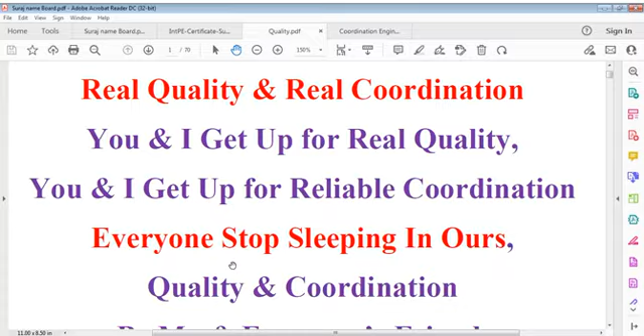And this is my official identification: I'm a fellow of engineers, a chartered engineer, an international professional engineer, and an arbitration engineer as well. This is my certification of international professional engineer, and this arbitration engineer. I'm on the roll of arbitration engineers and on the panel of the Institution of Engineers. Here is the chartered engineer certificate, civil engineering division, because I am a fellow, and this is the file related to quality and coordination. I am closing the chartered engineer certificate and the arbitration engineer file for the time being, because they're not required now. I'll put some of the files in between just to let you know who's talking to you. And now back to you.

I'm on the quality file, and the quality file talks seriously about quality. Quality is a very important part for me as a professional, as well as for everybody who is a professional or a product user who pays money to buy a product. And the coordination file asks everybody what is the meaning of coordination and what's the meaning of quality.

Quality is something that is mandatory, even though there may not be rules, but if you pay to buy something, everybody expects to get a quality product. Whatever is indicated on the product, whatever is claimed about the product, or whatever specification the product should have, the product must have that, or else we can say we are being cheated.

We all buy products, it's life. We buy products which are to be used only for a couple of months, some are used for a couple of years, and some are used for whole life. And it's not an independent product as well, or it's not that only an individual uses it, the public uses it. You have products like national infrastructure or state infrastructures.

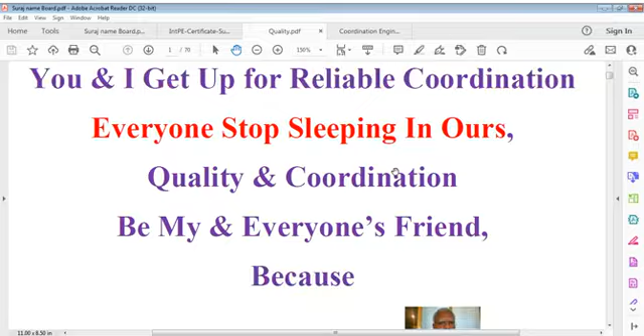I should think of quality, and if I don't think of quality, then there is no meaning of my becoming an engineer or my becoming a contractor or my becoming a consultant or whatever I have. That competency, that consistency has got no meaning if I can't think of quality, if I can't deliver quality. This means I'm not qualified, in fact, for that. It's not simply qualification here, that's academics, that's qualification of competency, qualification of caliber. That I can't do quality work, I can't coordinate.

And that's what I say, that there are, say, two domains, which we may call domains, we may not call domains, and that's real quality and real coordination. When I talk of real, this means this should be practical. It's not simply on papers, but should be on products. Real quality and real coordination are very important for me, for everybody.

And if we can't do that, there's no meaning of being a professional. A professional is a professional. A professional must justify that professional meaning that a professional understands.

I don't consider only academics as professional. That is a professional start, we say, whatever degree you have. I'm not going to criticize any academic degree because that's a must, and without earning academic degrees you cannot enter a profession. That's also true. But you cannot just put a full stop or a period on a degree.

You have to start working when you get a degree. Start working doesn't mean a job. I'm saying that the practice of the work which you are going to start, or whatever work you are given, should be within requirements. It should be within specifications. It should be within the purview of designs. Designs and design executions both must be within agreed quality limits.

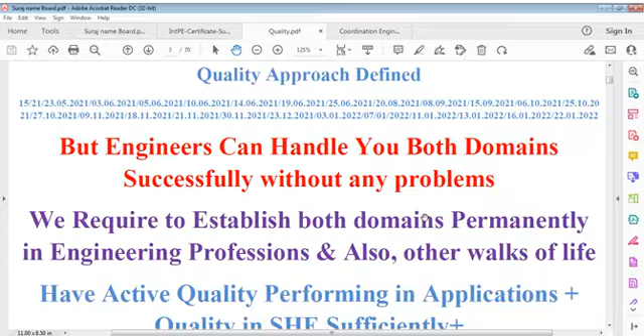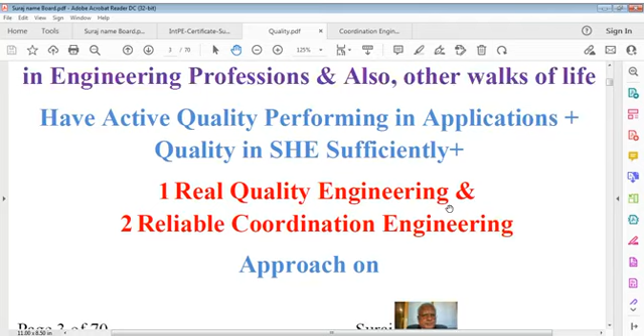That's why we have to be very serious about this issue. We cannot go without quality, we cannot go without coordination, and it is engineers' duty to do that because they can handle it successfully. We have to establish both permanently in our profession and in life. Real quality engineering and coordination engineering are a must in working designs, construction processes, manufacturing, and assessment. We have to plan, do, check everything, and fix real quality in our country and everywhere.

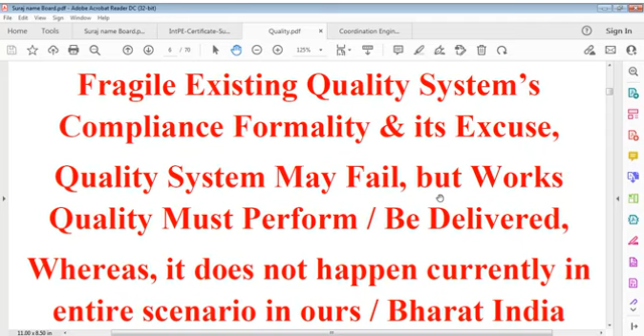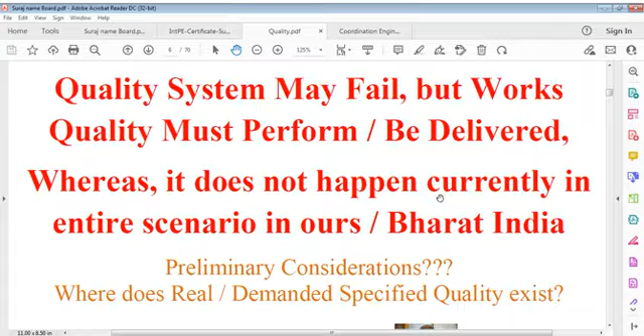Come what may, no excuse for any concession, no excuse on quality requirements, no compromise in the name of a fragile existing quality system, compliance formality and its excuse. The quality system may fail, but the quality of works must perform. Whereas that doesn't happen currently in the entire scenario in Bharat, India. The existing red lines, we have to resolve them, and that's a very important point.

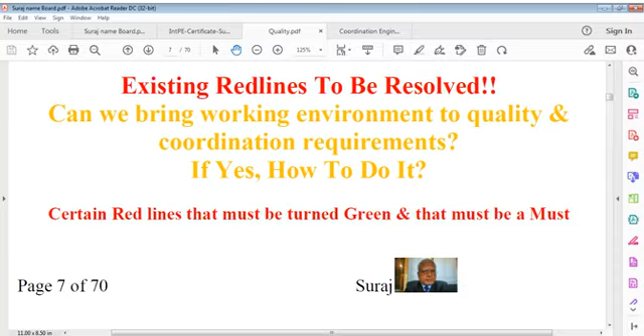Now we go to coordination, and reliable coordination is very important in engineering, in projects, for the public and engineers. We cannot just run away because of that. We have to see ourselves well established, and that's an important point we have to think of.

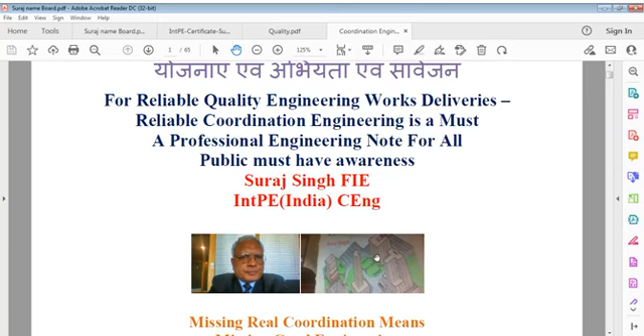I could speak in Hindi, but I'm speaking in English for everybody. This message should go to all people, so I'm not confining myself to Hindi or a regional language. Those who are interested know what quality is and know the language. Missing real coordination means missing good engineering, and it's a very important job that we should not miss. There are many points on that we'll consider.

I'll come back to this file later on. We're 15 minutes over, no problem, but I'm going to open another file, the one we continued last time, the concrete file. The coordination file, concrete file, is here.

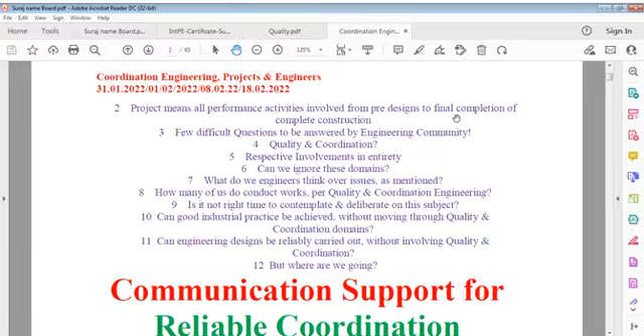I'm going to open it now, and that is the concrete file. Yeah, that is what we used to discuss last time. Until last time, many times we discussed that one, and it's really interesting. I'm going to open this now, the concrete file from Japan, because specifically it is for people. It's a very important file.

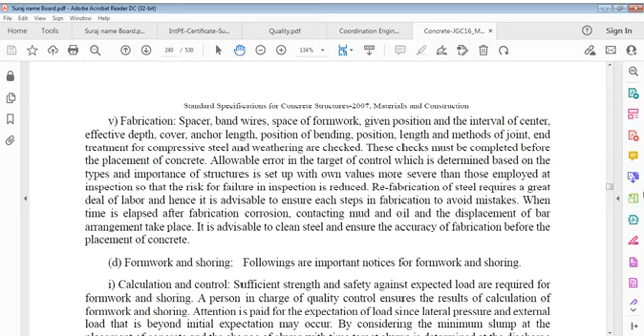This is the cover of the file, and we see, I think, let us say 230 or 240 pages it is. Let us see where we reach here, and how it works. Let me say 240 pages. I'll go further. Quality control of concrete structures, and that is here: inspection conducted by contractor, and before that, quality control of concrete structures.

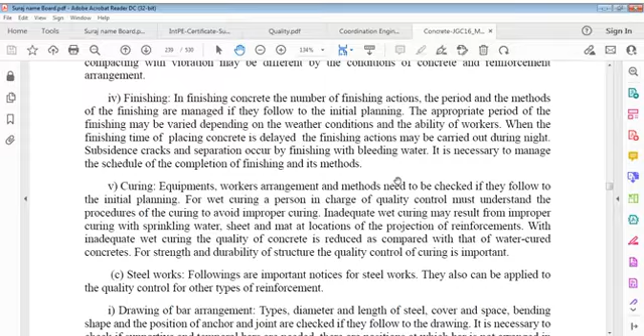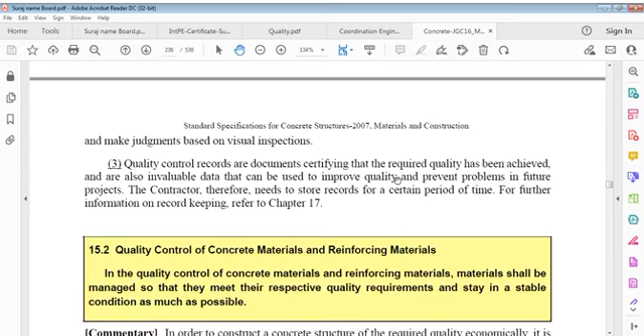Let's come back, just for a refresher, to what we did last time. Quality control during construction, quality control of concrete, and this is quality control of concrete production. So it's quality control of concrete material and reinforcing material we discussed last time, because there was some disruption in the video that time. If we speak fast about that, yesterday we covered it, but there was a disruption at the end.

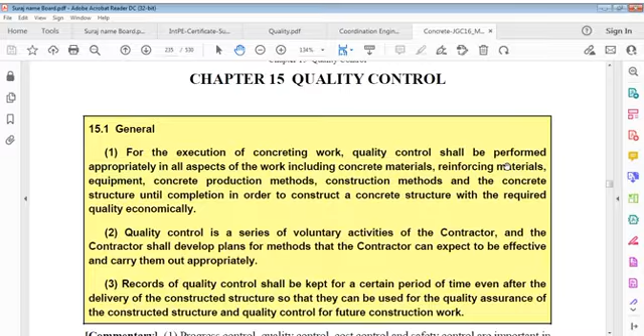General: for execution of concrete work, quality control shall be performed appropriately in all aspects of work, including concrete materials, reinforcing materials, equipment, concrete production methods, construction methods, and concrete structure until completion in order to construct a concrete structure with required quality economically.

Quality control is a series of voluntary activities of contractors, and contractors shall develop plans for methods that the contractor can expect to be effective and carry them out appropriately. Records of quality control shall be kept for a certain period of time, even after delivery of the constructed structure, so that they can be used for quality assurance of the constructed structure and quality control for the future.

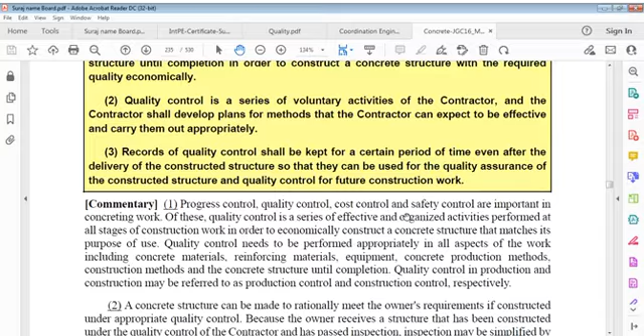Progress control, quality control, cost control, and safety control are important in concrete work. Indeed, they are all important. Of these, quality control is a series of effective and organized activities performed at all stages of construction work in order to economically construct a concrete structure that matches its purpose of use.

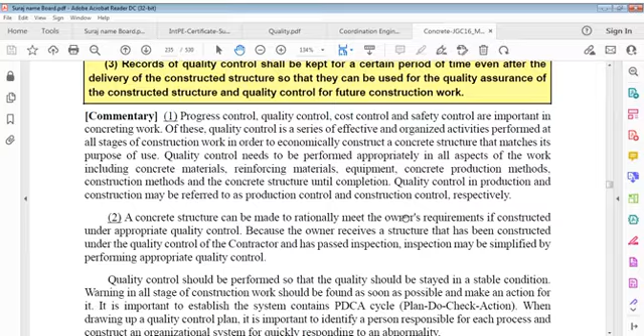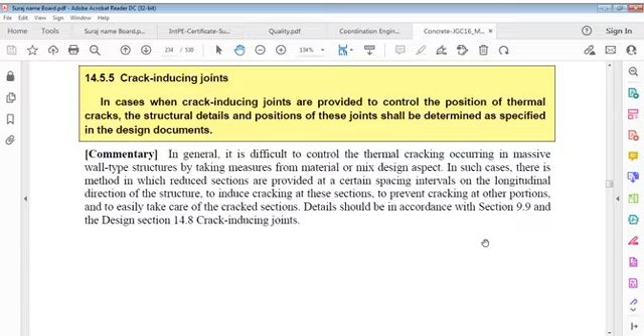Quality control requires to be performed appropriately in all aspects of work, including concrete materials, reinforcing materials, equipment, concrete production methods, construction methods, and concrete structure until completion. Quality control in production and construction may be referred to as production control and construction control respectively. So here is the difference between production control and construction control. And crack inducing joints, this we had discussed, so we are on the right path.

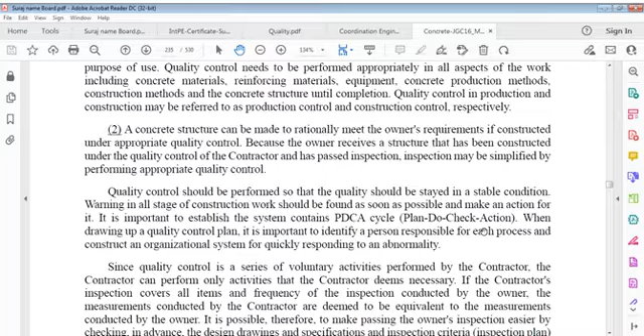A concrete structure can be made to rationally meet the owner's requirements if constructed under appropriate quality control, because the owner receives a structure that has been constructed under quality control of the contractor and has passed inspection. Inspection may be simplified by performing appropriate quality control. Quality control should be performed so that quality stays in a stable condition.

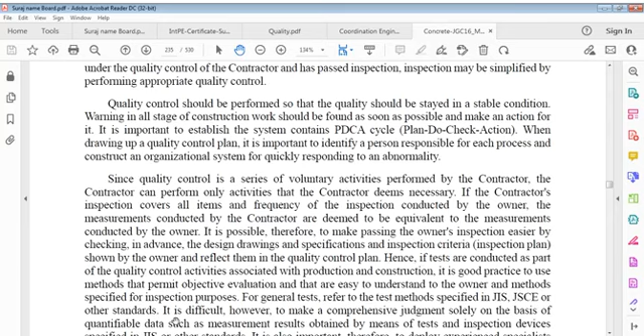It's important to establish a system containing the PDCA cycle, that is plan, do, check, act. When drawing up a quality control plan, it is important to identify a person responsible for each process and construct an organizational system for quickly responding to an abnormality.

Since quality control is a series of voluntary activities, the contractor can perform only activities that the contractor deems necessary. If contractor inspection covers all items and frequency of inspection conducted by the owner, measurements conducted by the contractor are deemed to be equivalent to measurements conducted by the owner.

It's possible, therefore, to make passing the owner's inspection easier by checking in advance design drawings, specifications, and inspection criteria shown by the owner and reflecting them in the quality control plan.

Hence, if tests are conducted as part of quality control activities associated with production and construction, it is good practice to use methods that permit objective evaluation and that are easy to understand by owner, and methods specified for inspection purposes. For general tests, refer to test methods.

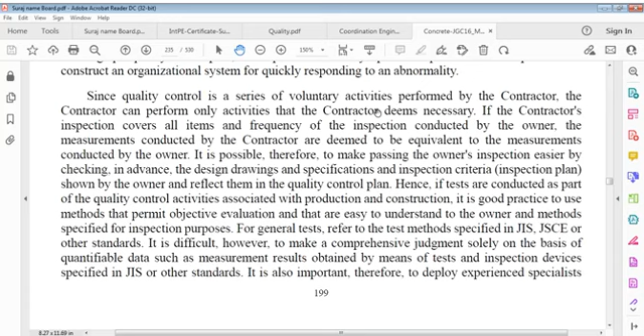It's difficult, however, to make a comprehensive judgment solely on the basis of quantifiable data such as measurement results obtained by means of tests and inspection devices. It's also important to deploy experienced specialists and make judgments based on visual inspections.

Quality control records are documents certifying that required quality has been achieved and are also invaluable data that can be used to improve quality and prevent problems in future projects. The contractor is therefore required to store records for a certain period of time.

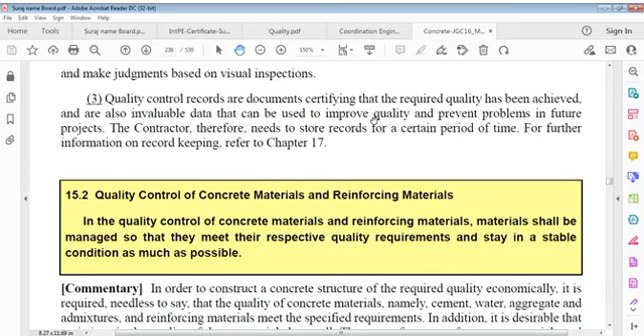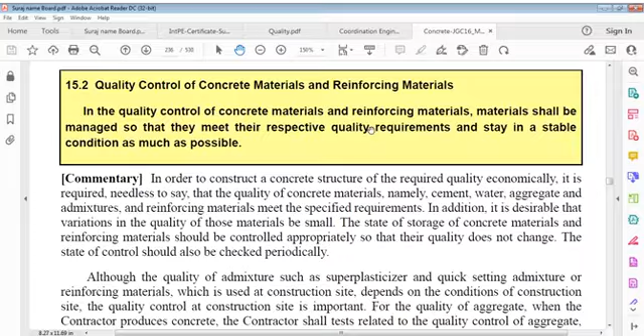Quality control of concrete materials and reinforcing materials. In quality control of concrete materials and reinforcing materials, materials shall be managed so that they meet respective quality requirements and stay in a stable condition as much as possible.

In order to construct a concrete structure of required quality economically, it is required, needless to state, that quality of concrete materials, namely cement, water, aggregate and admixtures, and reinforcing materials meet specified requirements. In addition, it is desirable that variation in quality of those materials be small.

State of storage of concrete materials and reinforcing materials should be controlled appropriately so that quality does not change. State of control should also be checked periodically.

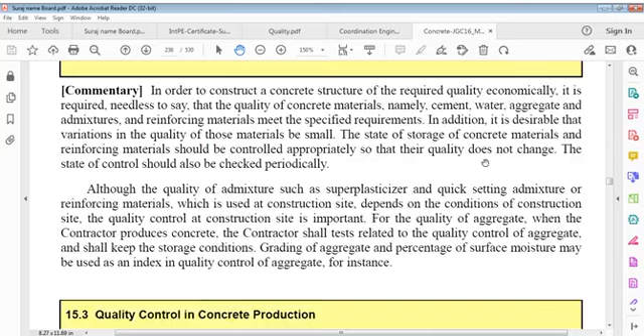Although quality of admixtures such as superplasticizer and quick setting admixture, or reinforcing materials being used at the construction site, depends on condition of the construction site.

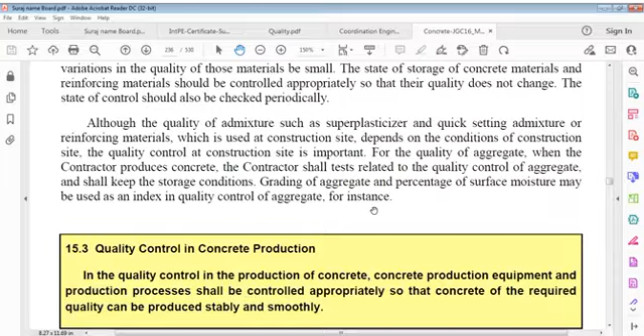Quality control conducted at the construction site is important for quality of aggregate. When the contractor produces concrete, the contractor shall test related to the quality control of aggregate, and shall keep storage conditions. Grading of aggregate and percentage of surface moisture may be used as an index in quality control of aggregate. For instance, quality control concrete production.

In quality control in production of concrete, production equipment and production processes shall be controlled appropriately so that concrete of required quality can be produced stably and smoothly.

In production of concrete, storage facilities, measuring equipment and mixers must be stored appropriately during the production period so that requirements specified are met. In order to continue to produce concrete of stable quality, it is good practice to measure surface moisture content of aggregate with moisture meters on a continual basis.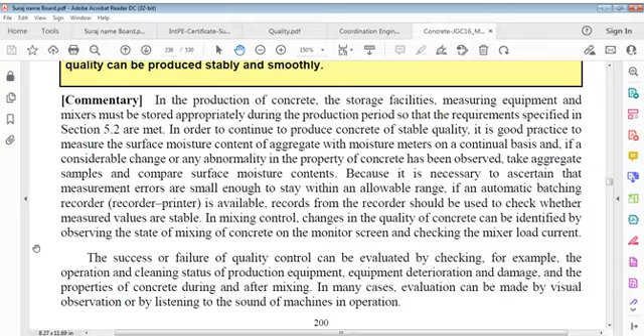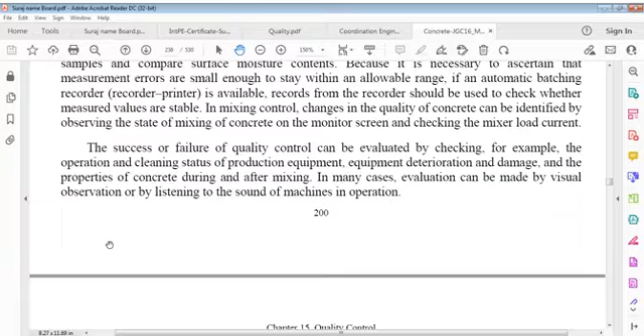Success or failure of quality control can be evaluated by checking, for example, operation and cleaning status of production equipment, equipment deterioration and damage, and properties of concrete during and after mixing. In many cases, evaluation can be made by visual observation or by listening to the sound of machines in operation.

Test results such as compressive strength, slump, and air content of concrete, these three, can be recognized by quality chart.

Obtained data is plotted in a chart with mean value, upper and lower control lines for quality control. Range of control line should be defined appropriately. When a result out of range is observed, it should be investigated whether the reason for change causes a permanent change of quality, and provision for it should be conducted.

Control limit lines shall be changed based on quality control data during the construction period. A histogram is used to represent distribution of quality, and rate of pass or fail and margin for quality can be assessed by histograms with criteria. Shape of histogram indicates warning signs in construction process, quality of used material, production of concrete, and testing.

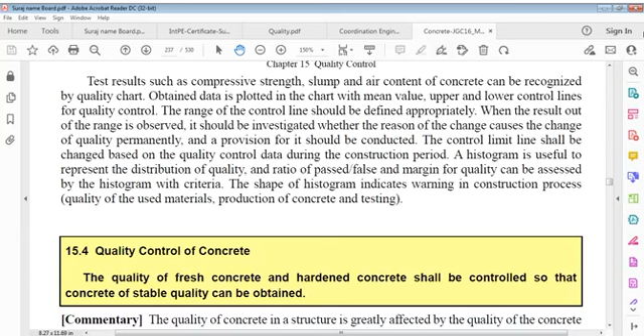Quality control of concrete: quality of fresh concrete and hardened concrete shall be controlled so that concrete of stable quality can be obtained. Quality of concrete in structure is greatly affected by quality of concrete used.

When controlling quality of concrete, therefore, it's important to accumulate quality control data and analyze data on a daily basis so that the relationship of quality of concrete with production of concrete materials and concrete can be quantified. Quality control should be conducted at appropriate period and frequency.

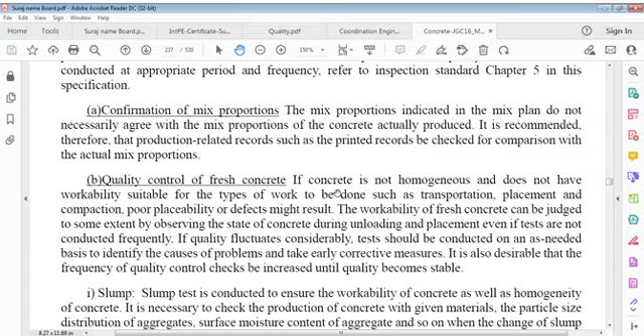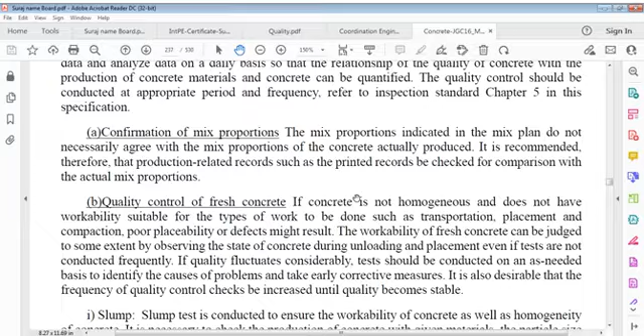Confirmation of mix proportion is part of quality control of fresh concrete, including slump. Mix proportions indicated in the plan do not necessarily agree with mix proportions of concrete actually produced. It is therefore recommended that production related records, such as printed records, be checked for comparison with actual mix proportions.

Quality control of fresh concrete: if concrete is not homogeneous in its mix and doesn't have workability suitable for the type of work being conducted, such as transportation, placement, and compaction, poor placeability or defects might result.

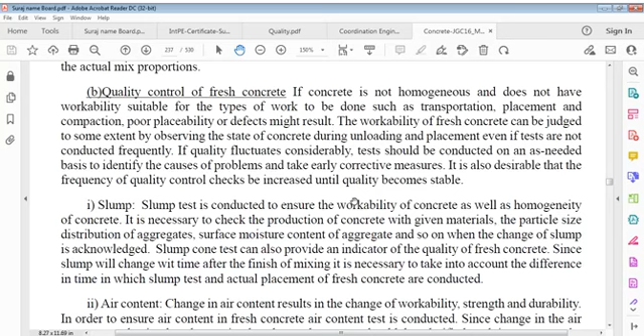Workability of fresh concrete can be judged to some extent by observing the state of concrete during unloading and placement, even if tests are not conducted frequently. If quality fluctuates considerably, tests should be conducted on an as-required basis to identify causes of problems and take early corrective measures. It's also desirable that the frequency of quality control checks be increased until quality becomes stable.

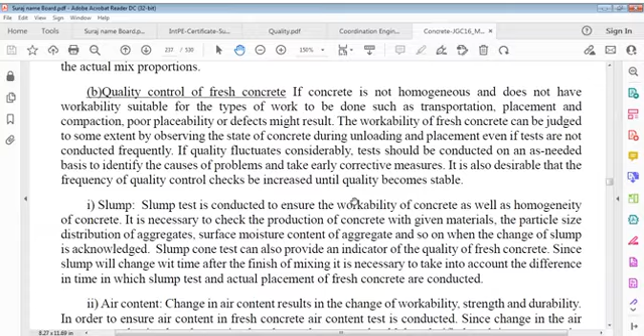The slump test is conducted to ensure workability of concrete as well as homogeneity of concrete. It's necessary to check production of concrete with given materials, particle size distribution of aggregate, surface moisture content of aggregate, and so on, when a change of slump is acknowledged.

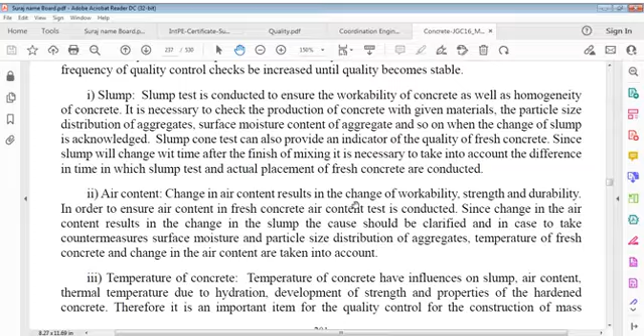The slump cone test can also provide an indicator of the quality of fresh concrete. Since slump changes with time after the finish of mixing, it is necessary to take into account the difference in time in which the slump test and actual placement of fresh concrete are conducted.

Air content: change in air content results in change of workability, strength and durability. In order to ensure air content in fresh concrete, an air content test is conducted. Since change in air content results in change in slump, the cause should be clarified, and to take countermeasures, surface moisture and particle size distribution of aggregates, temperature of fresh concrete, and change in air content are taken into account.

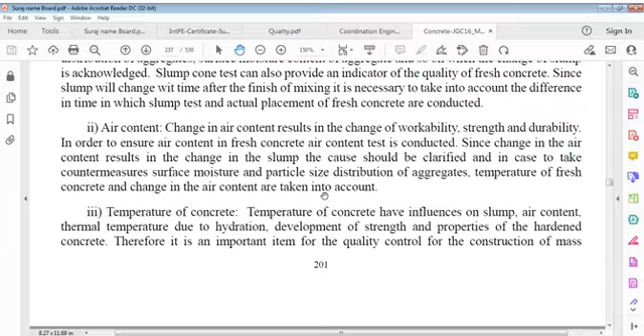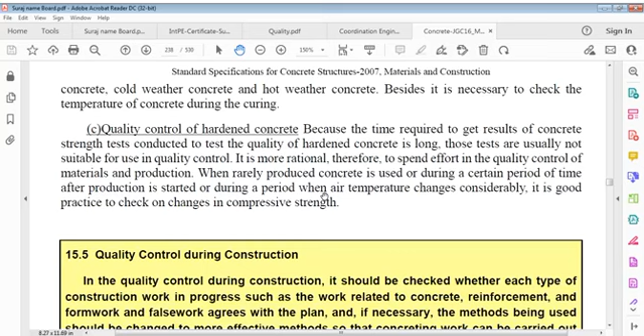Temperature of concrete has influence on slump, air content, thermal temperature due to hydration, development of strength, and properties of hardened concrete. It's an important item for quality control for construction of mass concrete, cold weather concrete, and hot weather concrete. Besides, it's necessary to check temperature of concrete during curing.

Quality control of hardened concrete: because the time required to get results of concrete strength tests conducted to test the quality of hardened concrete is long, those tests are usually not suitable for use in quality control.

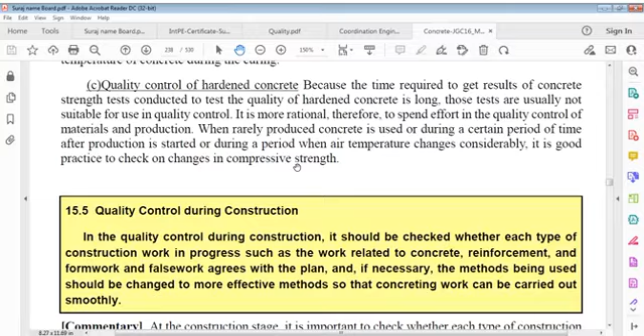It's more rational, therefore, to spend effort in quality control of materials and production. When rarely produced concrete is used, or during a certain period of time after production is started, or during a period when air temperature changes considerably, it is good practice to check on changes in compressive strength.

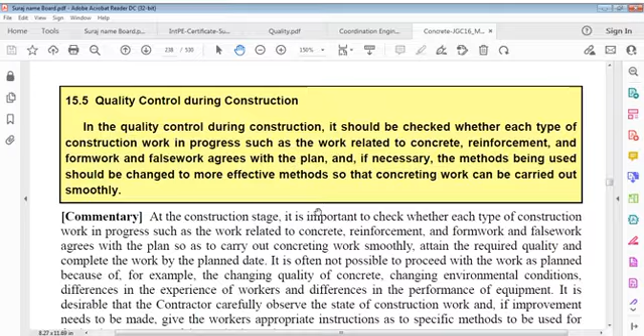Quality control during construction: it should be checked whether each type of construction work in progress, such as work related to concrete, reinforcement, formwork and falsework, agrees with the plan, and if necessary, methods being used should be changed to more effective methods so that concreting work can be carried out smoothly.

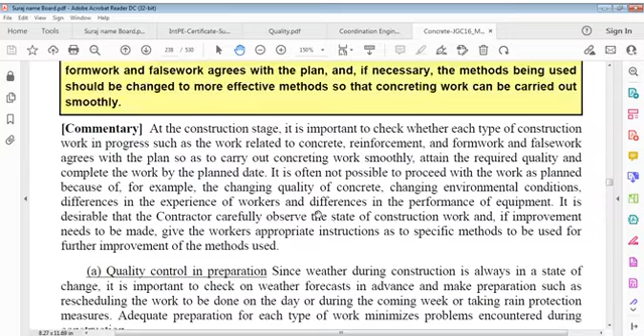At construction stages, it's important to check whether each type of construction work in progress, such as work related to concrete, reinforcement, formwork and falsework, agrees with the plan, so as to carry out concreting work smoothly, attain required quality, and complete work by the planned date.

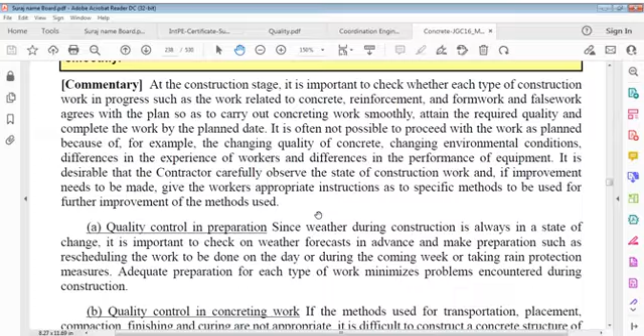It's often not possible to proceed with work as planned because of, for example, changing quality of concrete, changing environmental conditions, differences in experience of workers, and differences in performance of equipment. It is desirable that the contractor carefully observes the state of construction work, and if improvement is required, gives workers appropriate instructions as to specific methods to be used for further improvement.

Quality control in preparation: since weather during construction is always in a state of change, it is important to check weather forecasts in advance and make preparations, such as rescheduling work to be done on the day or during the coming week, or taking rain protection measures.

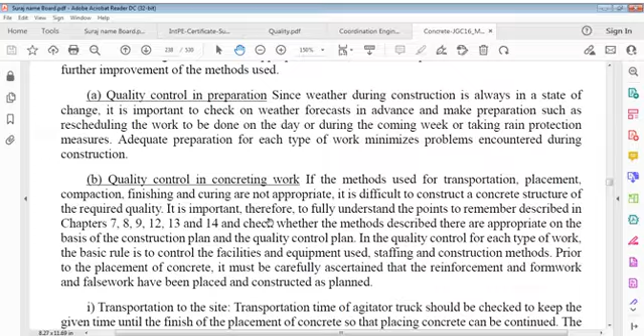Adequate preparation for each type of work minimizes problems encountered during construction.

Quality control in concreting work: if methods used for transportation, placement, compaction, finishing and curing are not appropriate, it's difficult to construct a concrete structure of the required quality.

It is necessary to fully understand the points to remember and check whether the methods described are appropriate, based on the construction plan and quality control plan.

In quality control for each type of work, the basic rule is to control the facilities and equipment used, staffing, and construction methods.

Prior to placement of concrete, it must be carefully ascertained that reinforcement and formwork or false work have been placed and constructed as planned.

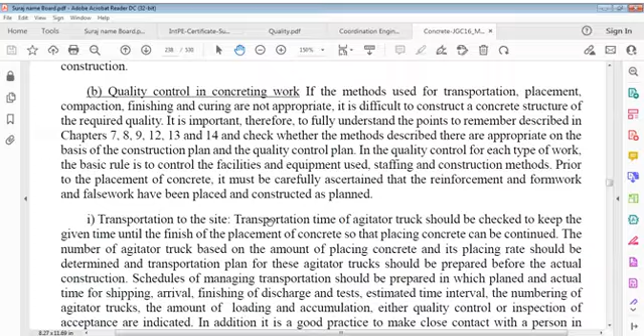Transportation to site: the transportation time of the agitator truck should be checked to keep within the given time until finishing of placement of concrete, so that placing concrete can be continued.

The number of agitator trucks, based on the amount of placing concrete and its placing rate, should be determined, and a transportation plan for these agitator trucks should be prepared before actual construction.

Schedules for managing transportation should be prepared, in which planned and actual times for shipping, arrival, and finishing of discharge and tests are indicated.

Estimated time interval, numbering of agitator trucks, amount of loading and accumulation, and either quality control or inspection of acceptance are also indicated.

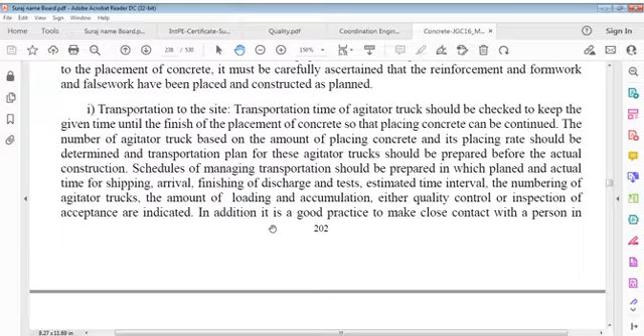In addition, it's good practice to maintain close contact with the person in charge of quality control at the factory and at the placing site. These practices make it easier to place concrete continuously.

Transportation within site: it is necessary to manage the types of transportation equipment needed or required.

Also manage their form and capacity, arrangement of personnel, and method of transportation according to the prepared plan within the site. A concrete pump is usually required for transportation within the site, and concrete pumping works.

Concrete pumping work will be left to the management or organization of specialists. However, it's important that the person in charge of quality properly advises on the method of pumping, considering the quality of concrete.

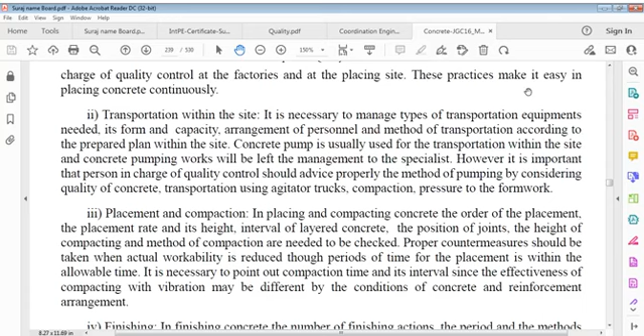Placement and compaction: in placing and compacting concrete, the order of placement must be checked.

Placement rate and its height, interval of layered concrete, position of joints, height of compacting, and method of compaction are required to be checked.

Proper countermeasures should be taken when actual workability is reduced.

The period of time for placement is within the allowable time. It is necessary to point out compaction time and interval, since the effectiveness of compacting with vibration may differ depending on the conditions of the concrete.

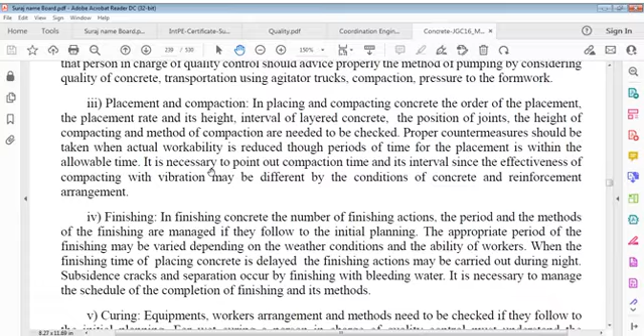Reinforcement arrangement also affects this. In finishing concrete, the number of finishing actions and the period and methods of finishing are managed.

Even if we follow the initial planning, the appropriate period of finishing may vary depending on weather conditions and the ability of workers. When the finishing time of placing concrete is delayed, finishing actions may be carried out during the night.

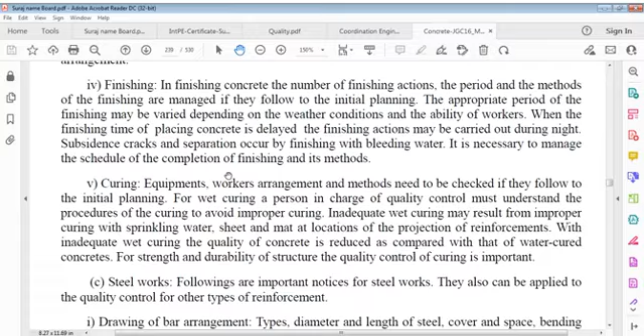Subsidence, cracks and separation can occur from finishing with bleeding water present. It's necessary to manage the schedule for completion of finishing and its methods.

Curing: equipment, workers' arrangement, and methods required are to be checked to confirm they follow the initial planning.

For wet curing, the person in charge of quality must understand the procedure of curing to avoid improper curing.

Inadequate wet curing may result from improper curing with sprinkling water, or from sheet and mat placement at locations where reinforcements project.

With inadequate wet curing, the quality of concrete is reduced compared with water-cured concrete. For the strength and durability of the structure, quality control of curing is important.

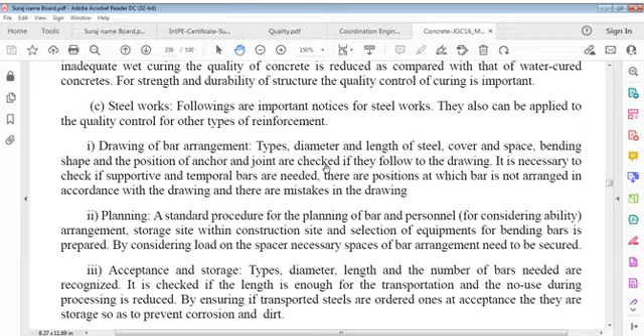Steelworks: the following are important notices for steelworks, which also can be applied to quality control for other types of reinforcements.

Drawing of bar arrangement, planning, acceptance and storage: types, diameter and length of steel, cover and space, bending shape, and position of anchor and joint are checked against drawings.

It's necessary to check if supportive and temporary bars are needed. There are positions where bars are not arranged in accordance with the drawing, and there are mistakes in the drawings.

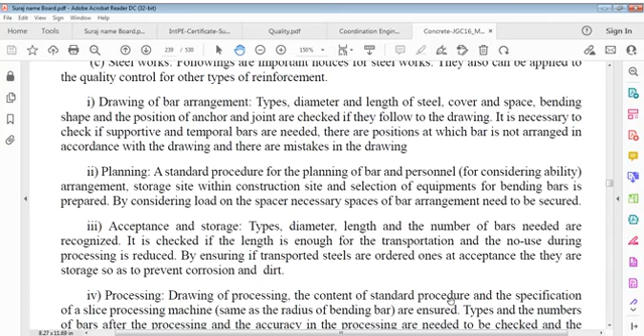Standard planning is the standard procedure for planning of bars and personnel, considering ability, arrangement, and storage site within the construction site, and selection of equipment for bending bars is prepared.

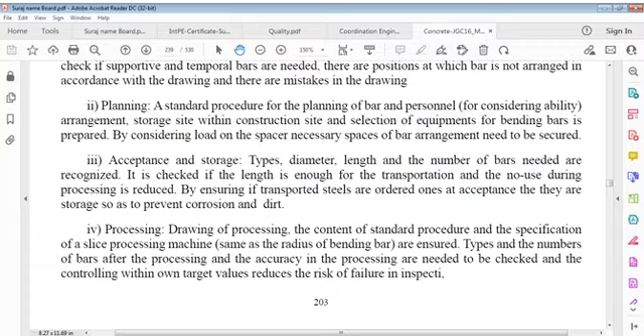By considering the load on spacers, necessary spaces for bar arrangement must be secured. In acceptance and storage, the types, diameter, length and number of bars required are recognized.

It is checked if the length is enough for transportation and that no-use during processing is reduced, by ensuring that transported steels are ordered correctly.

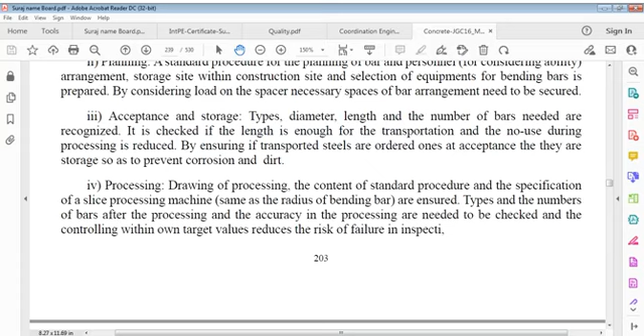Once accepted, steels are stored so as to prevent corrosion and dirt.

Processing: the drawing of processing, content of standard procedure, and specification of a slice processing machine are ensured.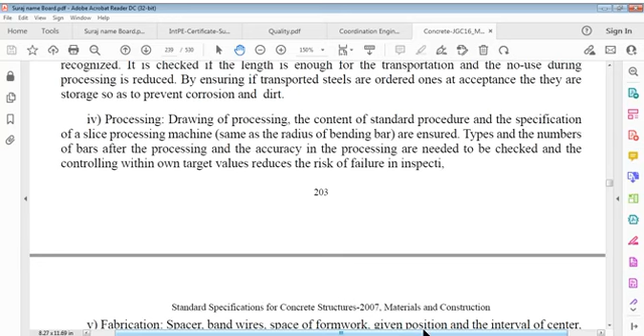Types and numbers of bars after processing and accuracy in processing are needed or required to be checked, and controlling within target values reduces the risk of failure at inspection.

Fabrication: spacer, band wires, space of formwork, given position and interval of center, effective depth, cover, anchorage length, position of bending, position, length and method of joint, and treatment for compressive steel and weathering are checked. These checks must be completed before placement of concrete.

Allowable error in target of control is determined based on types and importance of structures. Set up your own values more severe than those employed at inspection, so that risk of failure in inspection is reduced. Refabrication of steel requires a great deal of workers, and hence it is advisable to ensure each step in fabrication to avoid mistakes.

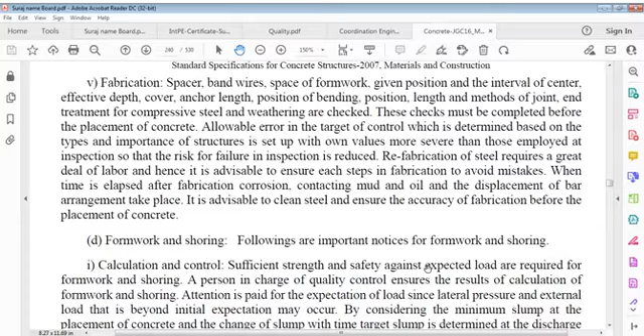When time has elapsed after fabrication, corrosion, contact with mud and oil, and displacement of bar arrangement take effect. It is advisable to clean steel and ensure accuracy of fabrication before placement of concrete.

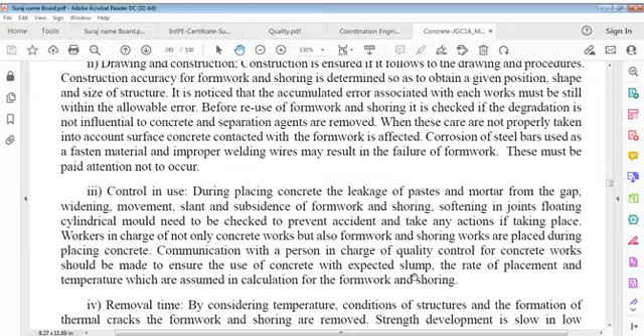Formwork and shoring. The points are here: calculation and control, drawing and construction, control in use, removal time. These are 4 points that we have to see. They are important ones. Formwork and shoring, and first is calculation and control.

Sufficient strength and safety against expected load are required for formwork and shoring. Person in charge of quality control ensures results of calculation of formwork and shoring. Attention is paid to the expectation of load, since lateral pressure and external load that is beyond initial expectation may occur.

By considering a minimum slump at placement of concrete and change of slump with time, target slump is determined at discharge of fresh concrete in specification. Increase in lateral pressure due to larger slump than minimum slump specified must be taken into account. It's safe to consider change in rate of placing and temperature of concrete.

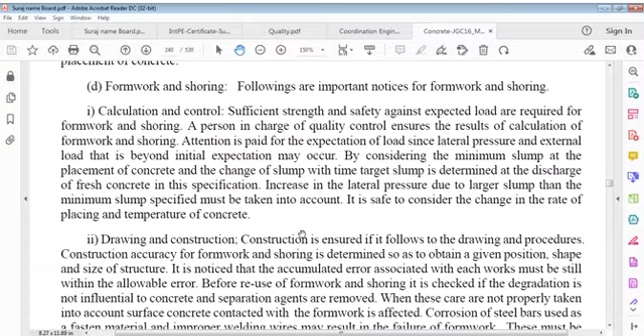Drawing and construction. Construction is ensured if it complies with drawing and procedures. Construction accuracy for formwork and shoring is determined so as to obtain a given position, shape and size of structure. It is noted that accumulated error associated with each work must still be within allowable error.

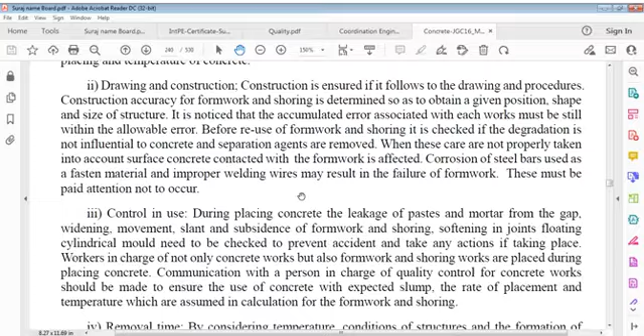Before reuse of formwork and shoring, it is checked that degradation is not influential to concrete and separation agents are removed. When this care is not properly taken, surface concrete contacted with formwork is affected. Corrosion of steel bars used as a fastened material and improper welding wires may result in failure of formwork. Attention must be paid so this does not occur.

Control in use. During placing concrete, leakage of paste and mortar from gaps, widening, movement, slant and subsidence of formwork and shoring, softening in joints, floating, cylindrical mold need to be checked to prevent accidents, and actions taken if they occur.

Workers in charge of not only concrete works but also formwork and shoring works are placed during placing concrete. Communication with the person in charge of quality control for concrete works should be made to make sure of use of concrete with expected slump, rate of placement and temperature, which are assumed in calculations for formwork and shoring.

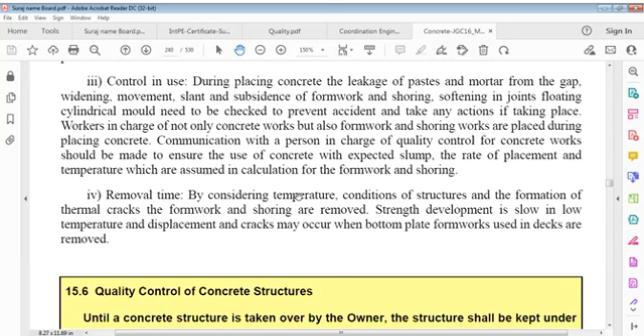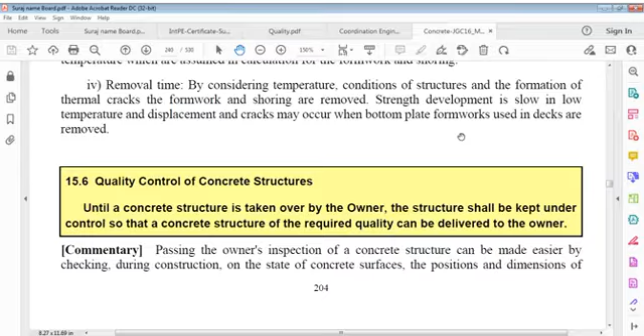Removal time: by considering temperature conditions of structure and formation of thermal cracks, formwork and shoring are removed. Strength development is slow in low temperature, and displacement and cracks may occur when bottom plate formwork used in decks is removed.

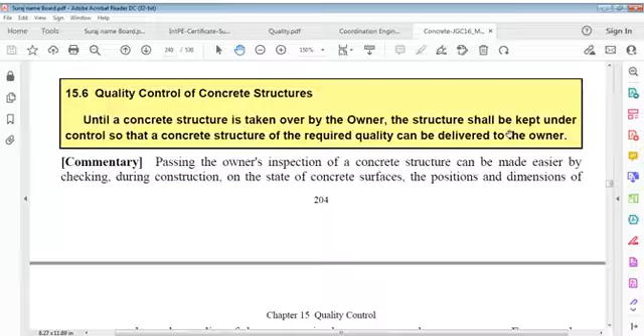Quality control of concrete structures. Until a concrete structure is taken over by owner, the structure shall be kept under control so a concrete structure of required quality can be delivered to owner. Passing owner's inspection can be made easier by checking during construction the state of concrete surfaces, positions and dimensions of concrete members, quality of concrete in structure and concrete cover.

Cracking might be caused by long-term temperature changes, drying shrinkage or changes in state of stress in course of construction, even if there was no visible crack immediately after completion of structures. A concrete structure may also be affected by environmental factors such as natural phenomena including typhoons and earthquakes, deformation of surrounding ground, and vibration caused by transportation facilities.

It's therefore advisable to periodically observe the concrete structure and protection works around it to check that there exists no abnormality during construction and after completion of structure until delivery to owner. If any abnormality is discovered, quality control personnel are required to report it to the quality control manager or responsible engineer and take appropriate corrective measures.

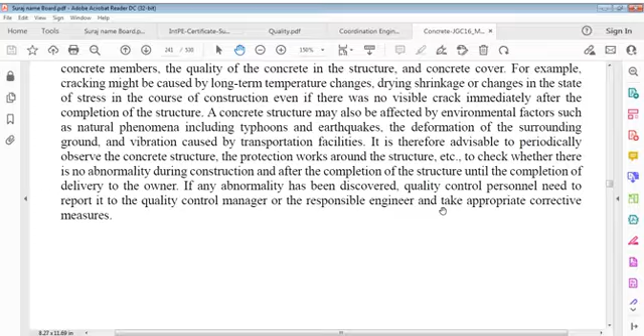Inspections conducted by contractors. Now it's actually a new start for contractors' inspections, which is maybe a very important point. Contractors' inspection.